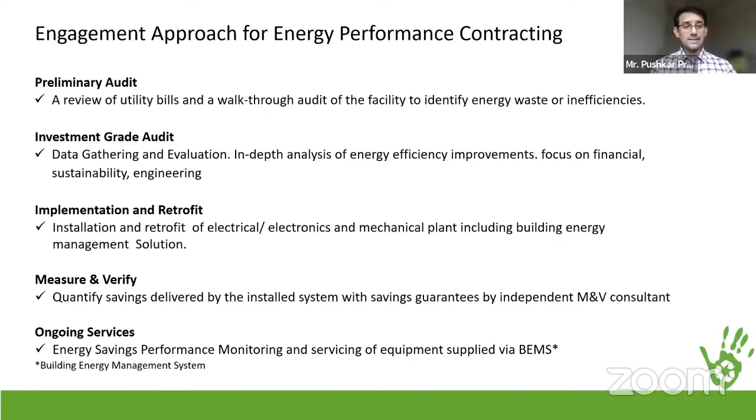Because these projects are typically long-term, the ROI comes between 2-3 years. It will also be an ongoing service in terms of monitoring the performance of the equipment and looking at how to optimize it, and that's where the building energy management system plays a big role. The good part of this model is that it has a positive impact on your EBITDA, and commercially, because there's a guarantee, the returns are very incremental. It's recession-proof—you see a reduction in utility bills and a reduction in carbon footprint, because energy constitutes a big chunk of our bills, specifically in the built environment or any facility management.

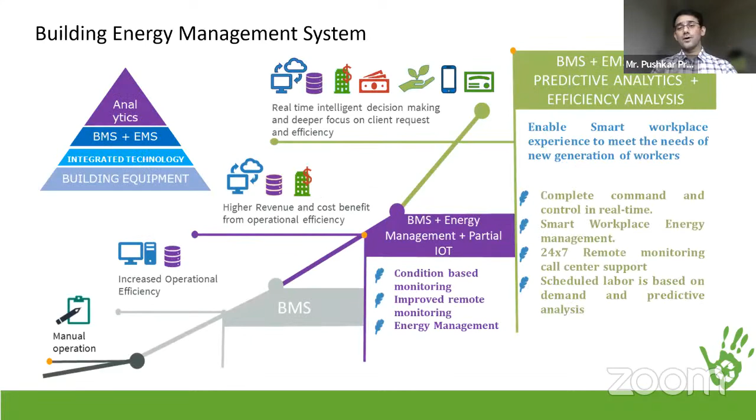Now, other thing that we also bring here is, while these are quite a lot of capex, and you have to plan out the project part of it, we know that aircon bills in typical every building constitute almost 52% of the total bills. And this is where we bring in a unique solution of the nets that we put in place. These nets are expected to get you almost 20-25% savings on the aircon bills. And this is very easy to install, does not need any sort of maintenance.

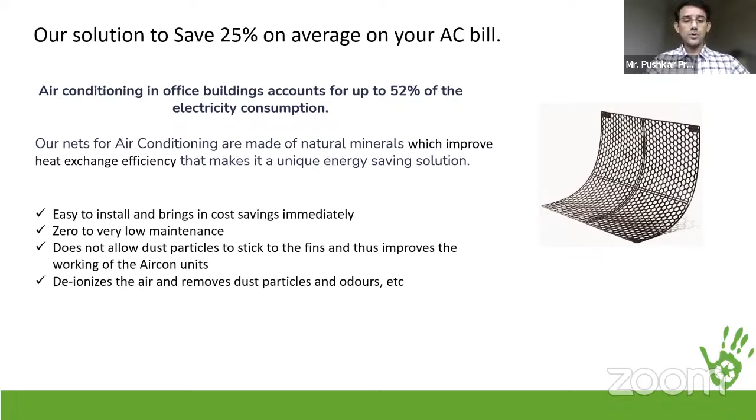And the way it works is that generally when you have aircon units, the air in that is all positively charged, while these nets are always negatively charged. So because of that, it offsets the static electricity that is there, and it brings in more heat exchange efficiency, and in that process also helps to reduce the aircon bills.

So with that, I will end my presentation here. I really hope that we are able to work together and get to a net zero and achieve the Prime Minister's vision, as said, for India as well as for Singapore. So thank you. I've left my contact details, and I look forward to hearing back from anyone who's interested. I'll take up the questions later, I believe.

Yeah, right. So thank you very much, Mr. Pushkar. What we like is the complete solution coming from your company, from your end, starting from feasibility to final implementation, and also the continuous monitoring that is so unique with regard to whatever services you may offer to some of the Indian corporates. So we'll come back with you, and we'll proceed further for the next presentation.

So now we have Dr. Shailesh Kharakwal. He is the Chief Executive Officer of H2O Mantra. Shailesh Kharakwal is a renowned expert in the areas of water treatment and water treatment for specialized quality or properties which can treat water of any kind, generated from whether an apparel factory or a commercial building or a factory or industry. So he has specialized solutions for every wastewater which is coming from different sources.

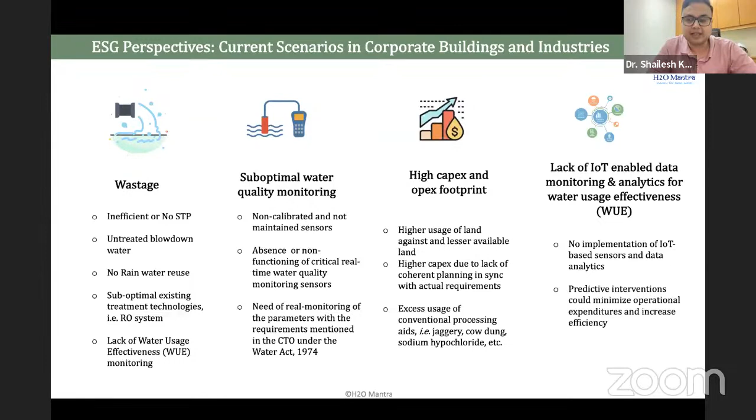Considering all these limitations, constraints, and requirements in today's scenario, we have developed EASE systems, which are basically environmentally accountable, sustainable, and energy efficient water solution systems.

They are environmentally accountable because we provide real-time sensing and automation. We extensively mitigate micropollutants and provide eco-friendly aids.

What we do is provide a low carbon footprint by minimizing the sewage treatment plant size or the water treatment plant size—I'll go into more detail in my next slide on how we do it. And we provide renewable energy integration; our plants can be run through the solar system. So our ambition is to provide a water neutral, or rather water positive, building, so that everything works in a sustainable way.

Whatever water is given to us by the municipal corporations, we recycle that whole water for our non-drinking purposes and also for drinking purposes. For this we have a mantra that we call RRR—not the RRR movie, but recycle, reuse, and reduce.

How we do this: recycling is through our IGBR technology, the state-of-the-art integrated growth bioreactor technology developed here at National University of Singapore. Reuse is provided through ZLD systems or rainwater harvesting systems. Reduce means reducing the footprints and the costs.

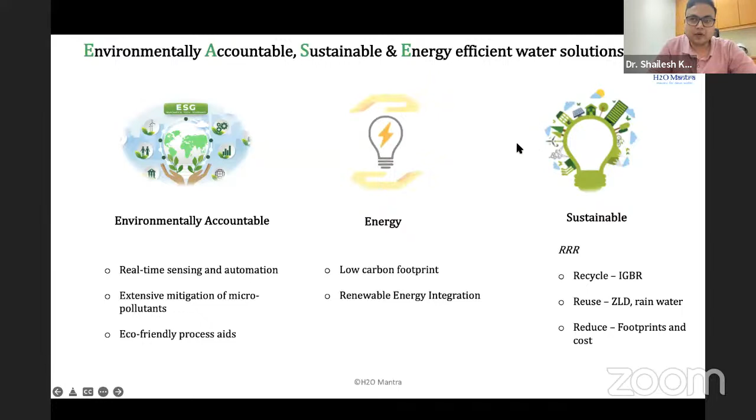Now I'm going to show you what a net zero building accounts to us, and how we can make a building water neutral or water positive. The alternative water use plus the water returned to the building, when divided by the total water use, should always give a value of one or more.

The alternative water use comes from rainwater or treated wastewater, whatever we are recycling. When we add them, the sum should always be higher than or equal to the sum of all fresh water use and all the alternative water use.

How we are going to do this, I would like to show you through a case study which we have successfully done for Nextra data centers at Pune. At the Nextra data center at Pune, there were 2 water sources.

Municipal water was coming—one water source from the municipality—and there was an alternative water source, the rainwater. So we made a rainwater harvesting tank there. We measured the flow of municipal water coming to the premise, and at the same time measured the rainwater flow, or the water depth in the rainwater harvesting tank.

We simultaneously did the treatment of the sewage water coming out from that premise and used that water for non-drinking purposes. At the same time, comparing the water coming into the sewage treatment plant versus water going out, we achieved 98% efficiency. This means only 2% of the water, made into sludge and later used for fertilizers, was wasted—98% of the water was used for non-drinking purposes.

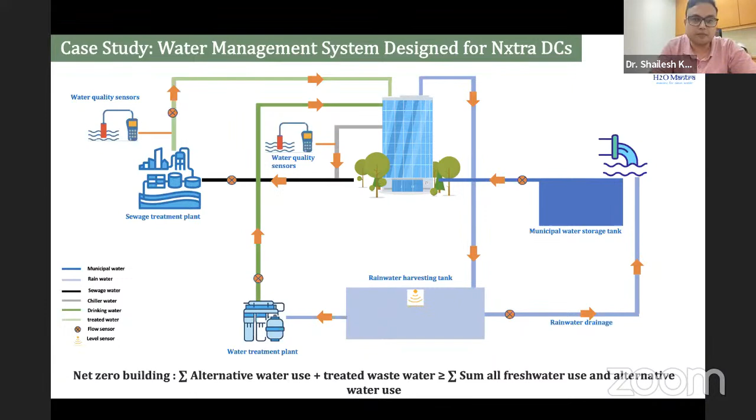I'm going to show all these things which we have proven, not just talking about them in terms of mandate or ideas, but already proven there. I'm going to show you a small clip of how we did it—it's a 5-minute clip. I would like to have your attention on that. Let me just show you.

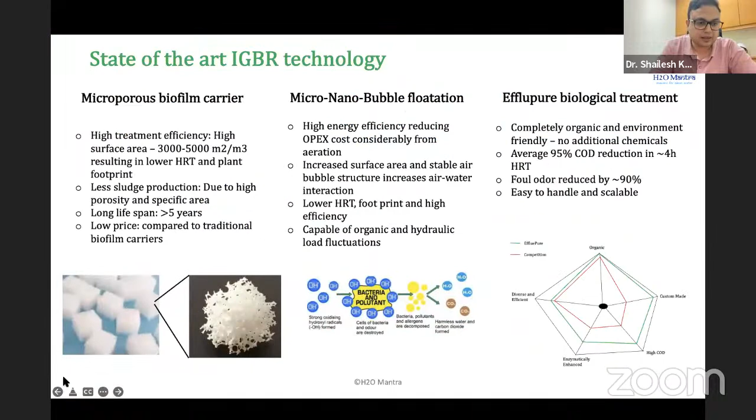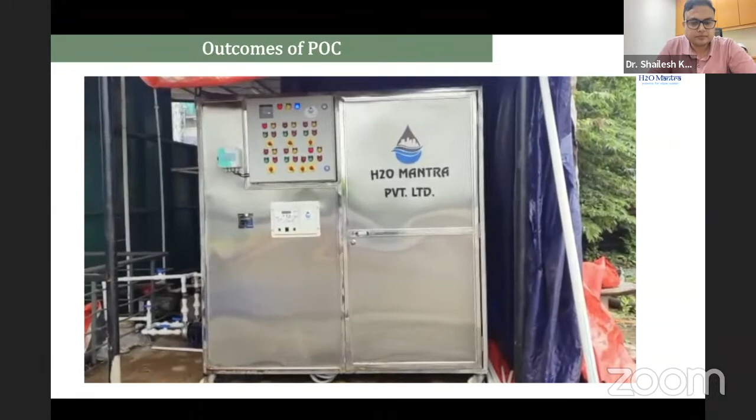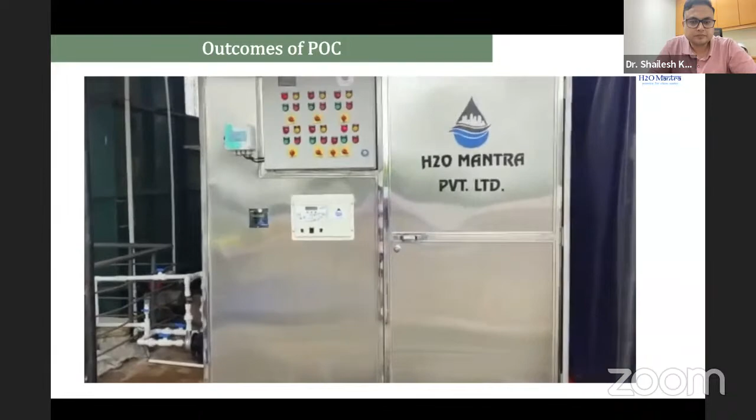This is a packaged sewage treatment plant from H2O Mantra, currently placed at Nxtra Hinjewadi, Pune location. It is based on state-of-the-art IGBR-based water treatment technology with all the unit operations encompassed into one compact unit. All the functionalities are also fully automated for its operation.

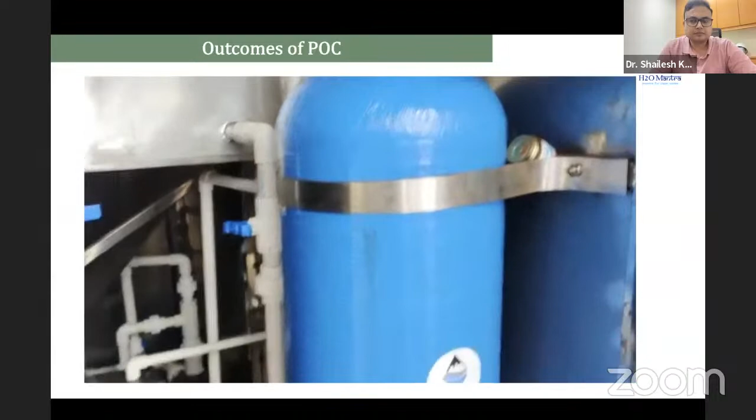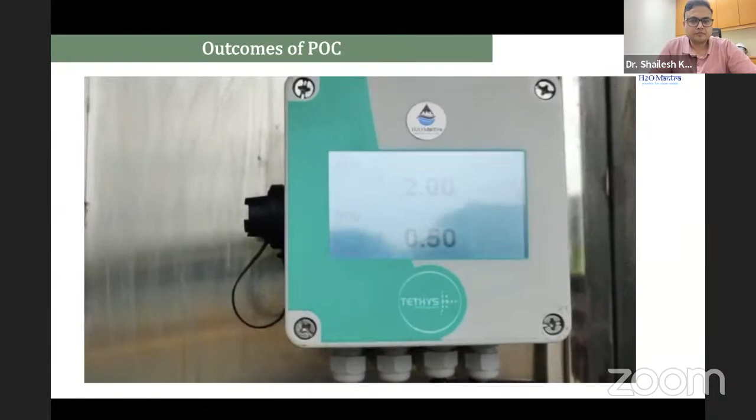This is a raw sewage water sample which will be fed into the STP system for treatment. If we zoom in, we can see different unit operations such as bioremedial treatment, oxo-nanoparticle-based filtration, and secondary treatment in the form of ultrafiltration. A real-time water quality monitoring solution displays 24/7 treated water quality. The treated water quality is significantly higher than the CPCB norms, making it possible to use the water for all non-potable applications.

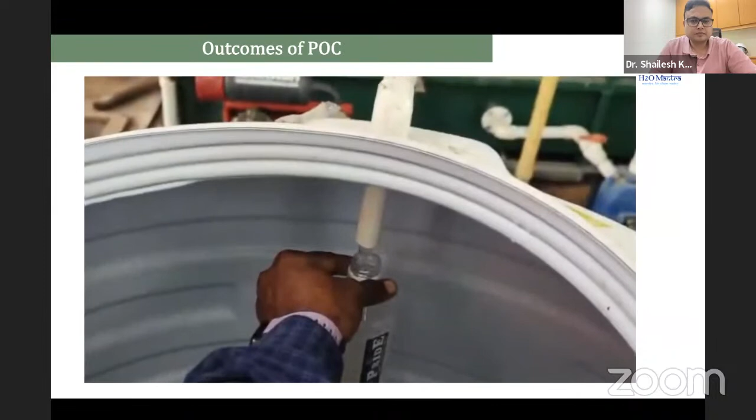This is also combined with a water usage efficiency monitoring system. With this high water quality of the treated water and more than 90% water usage efficiency, the sewage treatment plant is expected to create a positive ESG impact, moving towards making the entire facility a net zero water building. The treated water quality is very high and transparent compared to the untreated water.

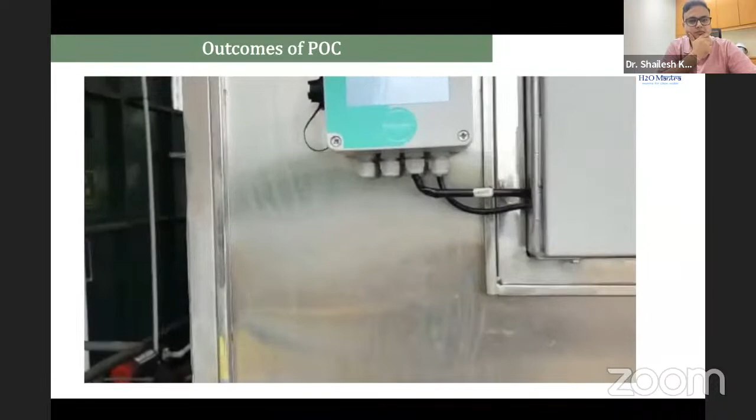The real-time water quality monitoring system and water usage efficiency sensors can be integrated onto the existing IoT platform for data visualization. This holistic exercise is aimed at higher ESG impact, paving the path towards a water neutral DC site.

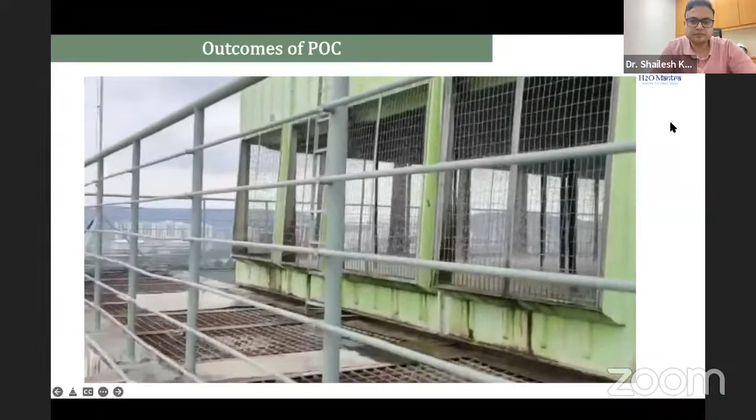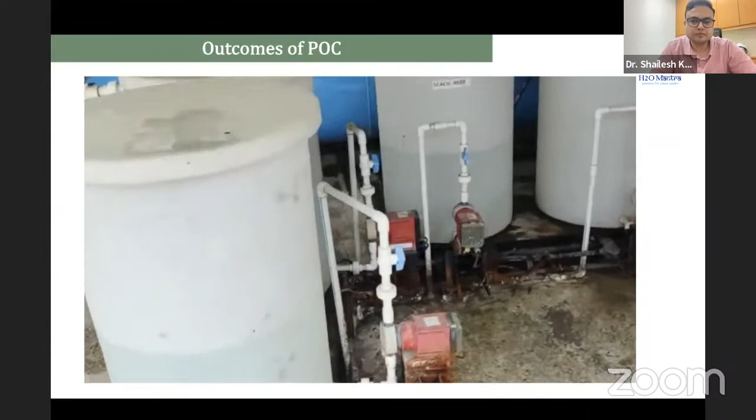Uncontrolled or suboptimal dosing of disinfectant for killing bacteria and antiscalant for removing hardness in data center chillers causes consumption of high amounts of chemicals and subsequently higher O&M cost. In the Pune data center, we observed chlorine and hardness monitoring have been done indirectly using some empirical methods.

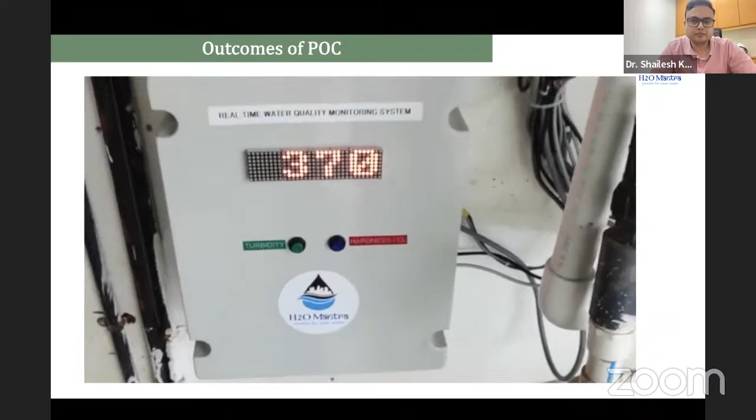Therefore, for providing exact free chlorine and calcium hardness concentrations in real time, we integrated our state-of-the-art free chlorine and hardness sensors. These sensors are integrated with the IoT dashboard and provide real-time values of the parameters. Using AI integration and trigger mechanisms in the IoT dashboard, we shall be able to control dosing of pumps for optimal use of chemicals and hence save on O&M.

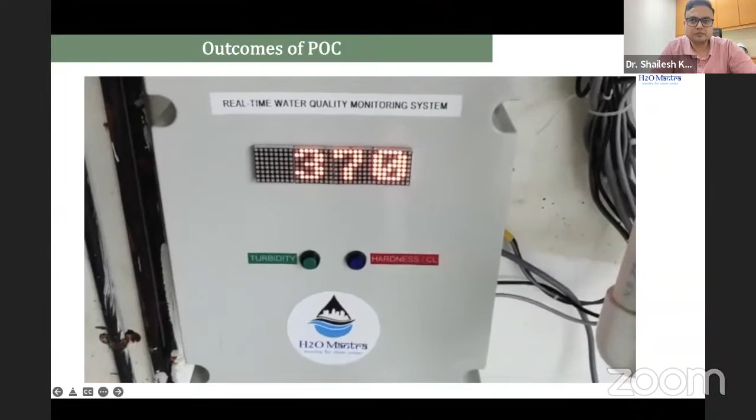We measured the water reuse efficiency there, and at the same time we minimize the footprint. The whole water treatment plant you have seen is the size of two car parking lots for two cars basically, and in that size we are able to treat around 50,000 liters of sewage water, changing it to ultra pure water which can be used for non-potable purposes.

We can use this for potable purposes also, which we have been doing here in Singapore, but for mindset reasons we kept it for non-potable purposes here. That is the IoT platform, and the rainwater harvesting system, how we are able to make potable water from the harvested rainwater.

So the technology behind this, when I talk about minimizing the footprint, minimizing energy usage, and increasing treatment efficiencies -- the technology is the microporous biofilm carrier, which provides high surface area and minimizes the hydraulic retention time. Micro nano bubble flotation provides higher retention time of bubbles inside the treatment tanks, hence decreasing energy use.

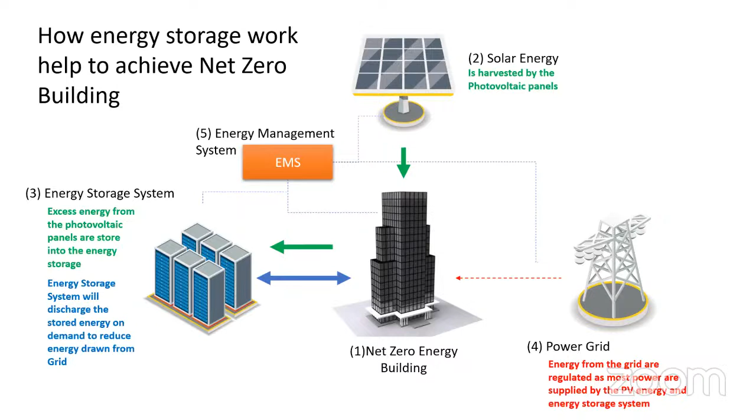Next, what are the factors we need to consider when looking into a net zero building? Firstly is the building consideration: load capacity, how much load the building requires, and whether there is sufficient land available for deployment of renewable energy assets to cover the load. Of course, one very important thing is the cost of the renewable energy assets, and this is one reason we need to assess whether solar, wind, or some other renewable energy generation source is most viable at the deployment location.

Next is the renewable energy sources itself. Correct sizing has to take into account the overall loads used by the building, whether the given land space is sufficient to build a renewable generation device big enough to support the whole load, and you have to take into consideration the energy generation fluctuations due to seasonal change of weather. In solar energy, certain months you have more solar energy, more exposure to the sun with less cloud coverage, and all this will change the amount of energy being generated per year.

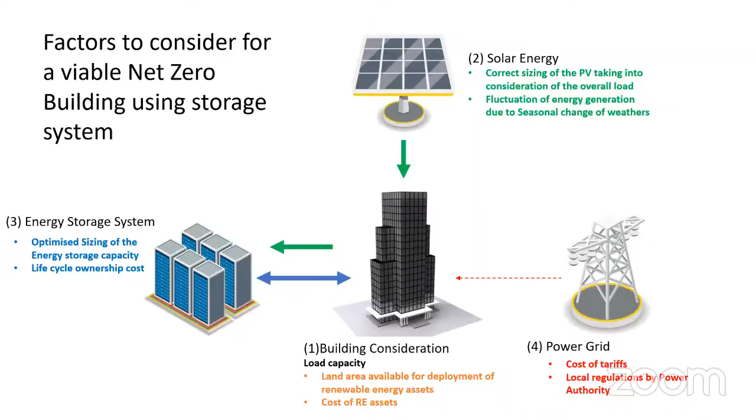And just to introduce GenPlus, we are founded in 2013. This year it's our 10 years. And for the past 10 years, we have been working in energy storage systems and renewable energy solutions. So we provide turnkey solutions for renewable energy to our partners and clients, particularly in the areas of energy storage deployment.

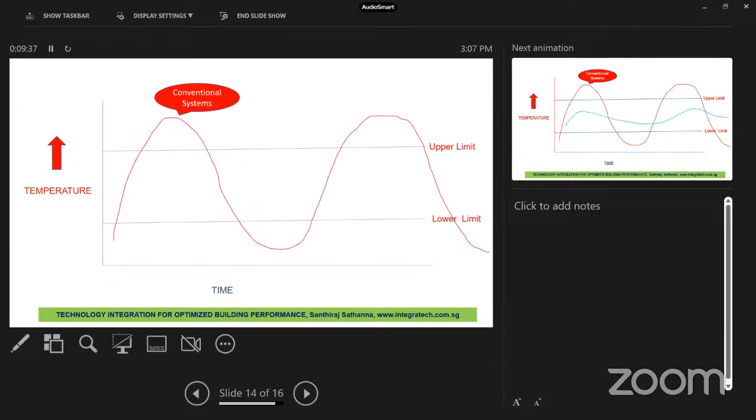For example, if you are having a conventional system, the parameter will travel or journey around the upper limit and the lower limit. If you use an AI and ML enabled system, it will stay well within the limits, and over time it will improve, and this variation will be limited.

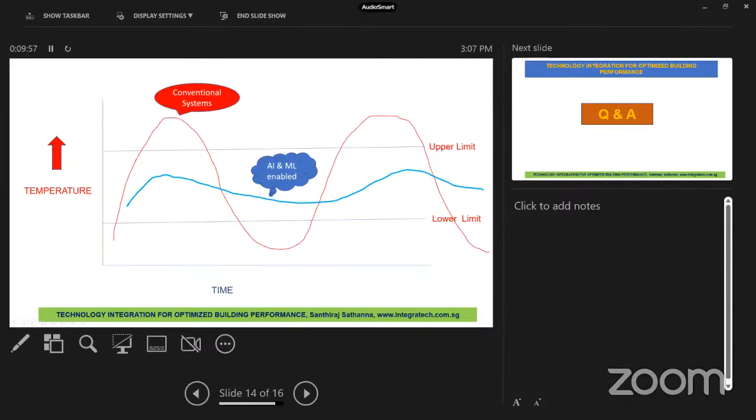I would like to invite first Pushkar. Pushkar, are you there? Yes. So one attendee has asked one question to you: what material have you used in the aircon filter which is there for energy efficiency? Please don't take much time because we are running late. Sure, yeah, it's some minerals that I used basically for deionizing as well as for creating a negative charge on that, but it's a patented product, so not much is disclosed at this point.

Okay, thank you. Then we have one question to Mr. Ming: what is the life of the battery which you are using in your energy storage solutions? Ming, are you there?

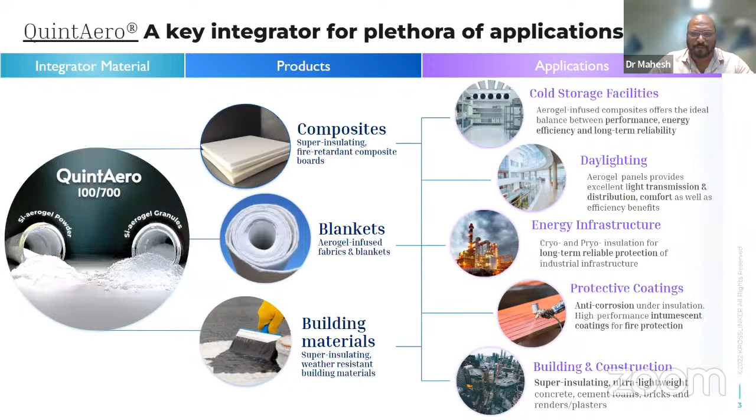These aerogel particles have very interesting properties in that they are able to diffuse light coming in from the sun outside. At the same time, they reduce the heat transmitted through the panel, and to a certain extent, the noise is also reduced. So there are several benefits you can see from just using aerogel particles.

In Singapore, green building initiatives are usually endorsed and regulated by BCA, the Building and Construction Authority. They have set a limit on the RETV values of buildings for residential, set at 25 watts per meter square. By using our aerogels in a whole plethora of building materials such as panels for daylighting, or even in a cement mixture, or as a plaster on a render system, we are able to reduce this by 2 watts per meter square.

What does this mean in terms of CO2 carbon emissions? It means a lot. Just by reducing 1 watt per meter square, we are targeting to reduce 1,900 tons of CO2 equivalent. This was studied in a feasibility study on a 6,000 meter square building.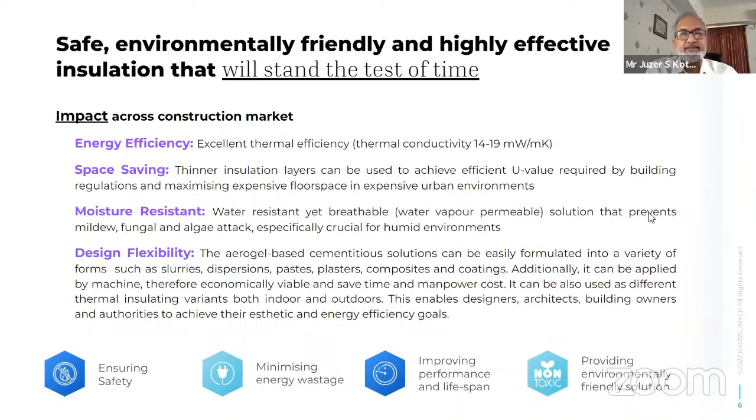How do you apply this? I mean, if it's between the two panes of glass, how do you apply the aerogel in between that? Do you have to go to the manufacturer to do that? How is it done?

We provide the design and the solution. So if it's between two double glass panels, we are able to fill it with the aerogel particles through a certain process, such as vacuuming or through a feeding stock. These are some of the solutions we provide for the manufacturers, so it will be very interesting for us to engage with several glass manufacturers who are able to use this as a use case in any of their building projects.

Which is why we recommend using it as part daylighting, part clear transparent. We can also try to improve the transparency of the panel. We have other means of increasing the transparency - for example, we can use a thinner lamination on the board, which will reduce the opacity of the panel.

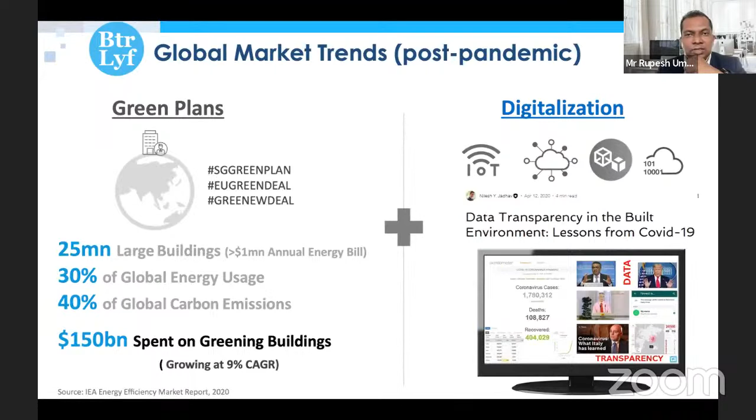So we all know the problem, right? How to have energy efficiency or how to make a building green. There's a lot of work been done on digitization, it's work in progress, and we are also working towards having a digital platform.

For buildings, most data are available with stakeholders like building owners, consultants, and ESCOs, with a few data sets available with product manufacturers. Green Finance is also looking for detailed, verified analysis for those buildings. So we have created a platform for all these stakeholders to put in the data available with them for any specific building and do the energy analysis. They get a base case scenario for that building and the best case scenario for energy enhancement.

So it's an AI-enabled digital platform. There's data input from various stakeholders, and the platform analyzes based on all the artificial intelligence and machine learning capabilities of the platform, and gives the result.

We are also working on a fully digital assessment for carbon analysis, as well as financial analysis due diligence. Chi Square is basically a spin-off from NTU Singapore, and we also have a good association with BCA.

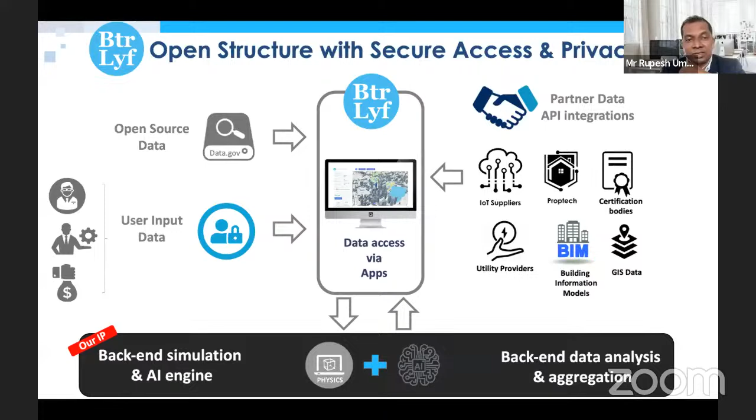That is it, thank you Mr. Rupesh. Very interesting — all of us are looking at something like a ChatGPT in our built environment business. I hope your tool comes true to that. It looks like it's going in that direction.

So before the audience asks a few questions, there is a lot of talk about digital twinning going on. Could you explain, because I think you are somewhere in that realm, what digital twinning is, and how would it help, and whether your platform would be in a position to do that?

Yes, so digital twin, as we know, there are two — one is static and one is dynamic, right? Static is utilized by construction companies, so static is basically a BIM model for that particular building, and dynamic is the one which we create on simulation software for energy analysis.

So the concept of the platform started from digital twin itself. For Singapore, what we have done is pilot projects on simulation software, that is the digital twin thing, and we cross-checked our platform's ability by putting in similar data sets without creating a model on the simulation platform. Obviously digital twinning is a time-consuming process and needs expertise with these softwares. But a platform like ours would be a simplified tool working on the digital twin concept for energy analysis.

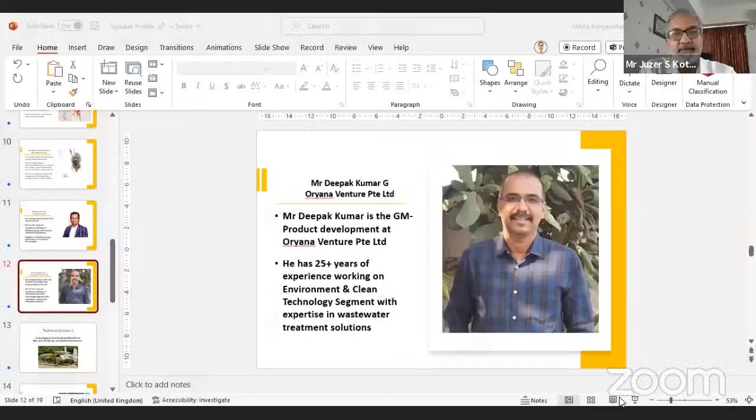Mr. Rupesh, question. Do we have time, or do we look back in the end? I think we are running short on time. I'm getting messages saying that we are really short, but I think this panel is too short to do justice to your topic. I think we need a much more detailed presentation. I myself am a very passionate simulator, and I can understand what you are talking about and the complexity of that. We would look forward to talking to you again. Thank you so much. You will have to excuse me because I have to do another presentation here on decarbonization, so I'll have to log off. Fine, okay, thank you very much.

So we have the last panelist, Mr. Deepak Kumar Ji. Deepak and I are colleagues earlier, so I know him well. Deepak is the General Manager Product Development at Oryana Venture Pte. Limited. He has 25 plus years of working experience in environment and clean technology with expertise in wastewater treatment solutions. So over to you, Deepak.

Thank you, sir. I'll try to put it in the next 3 minutes what best information can be shared with the audience. Oryana Ventures is a technology-based organization trying to develop relevant platforms to deliver advanced environment management products and solutions. We are 60% owned by Singapore families, that's how we got into this platform. Getting straight into the crux of the discussion, net zero water, because we are basically into water, STP, sewage treatment plants.

To set the context, the pain points of any builder can be listed like this: we need quality, we need to use cutting edge technology, and we also have to have good vendors on board. At the end of that, we should be operating it with ease and also maintaining it with ease, towards meeting the compliance of local norms and regulations. So on top of doing all these things, the builder also has pressure to meet net zero targets. It's not pressure though, as the context was set well earlier, that it's good to do a net zero building in this trend of climate change.

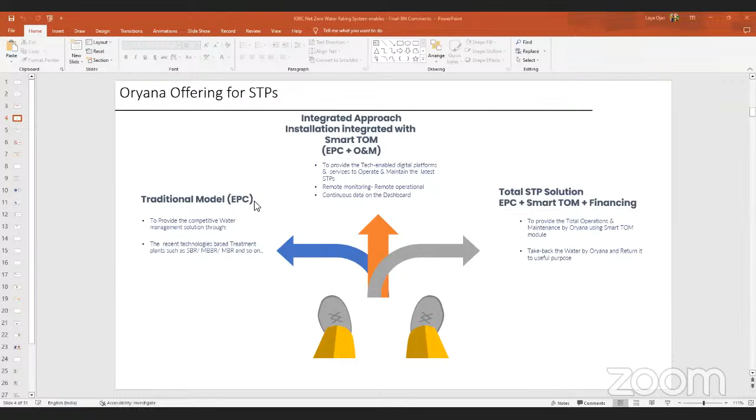So, Deepak, we are a bit short on time, so you can wrap up in 30 seconds. Sure. Looking at how we are trying to align with the IGBC perspective, it's again design from the design, construction, and operation stage.

We are looking at designing suitable sewage treatment plants and also harnessing the alternate water, connecting the alternate water with the right use, 100%. Maximum 40-50% within the campus, but the remaining 50% also, how do we connect it with the right purpose, is actually delivering the whole business model. And we have a few case studies.

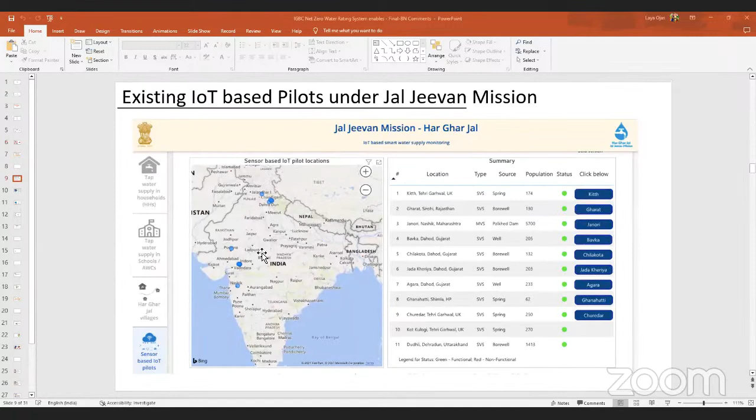Thanks, Deepak, I think you touched the core. There are STPs and STPs in India, but none of them run properly. So what technology or what do you do differently by which your STP will run better, or run without too much expert supervision?

Correct. So we are not developing an altogether new technology of STP in the market. There are technologies like SBR, MBBR, MBR. We are developing a module which takes care of remote monitoring, remote management of the plant, which needs less skilled manpower. Today, nobody is interested in investing in skilled manpower—that is a huge cost for running it.

And after spending that cost, there is no take for the treated water or whatever. So connecting that with deploying the smart module, improving the efficiency of operations, and also connecting the treated water with the right purpose, is the whole business model we are looking at.

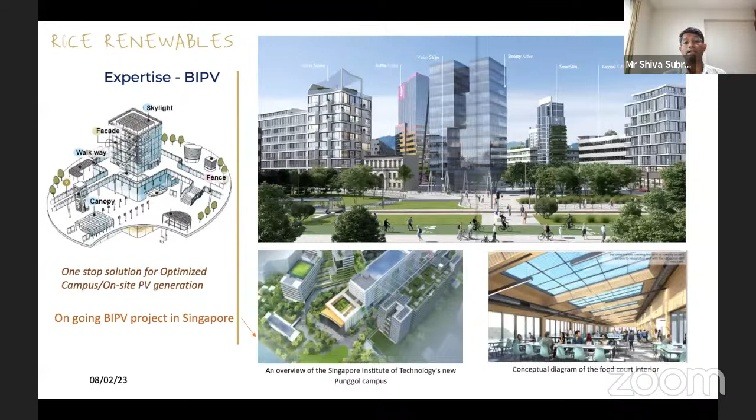So what differentiates us from other PV system integrators is this expertise. We have worked in almost all building related PV applications, be it walkway, facade, or skylight, we have experience. And together with my partner, which is a Japanese MNC, we have more than 200 project execution experience throughout the world.

Now, a bit more on the BIPV panels. Typically, this is a blown-up view of a typical PV panel. At the front there is glass, and at the back there is glass. The solution we bring to you is a glass-glass interface. In between, there are panels and cells sandwiched between protective layers. For a conventional panel, the portion you see here would be a backsheet, but for buildings, mostly it is a glass application. So all our solutions that we work on with stakeholders are glass solutions.

Now, the range of power output can be as low as 50 and go up to 160 watts per meter square. It really depends upon the application and requirements. In the subsequent slides, I'll explain why we have such a big range.

And it's customizable. When I say customizable, we do not have one standard size. Every project is unique, and every project we discuss with our architects has a different size, sometimes in odd shapes. So we can actually deliver these odd shaped sizes, and we work with the architects giving them inputs like what is the best efficiency, what is the best size for a given area, what is the best possible power output achievable, and how can we optimize this. These interactions go on for at least 1 or 2 years before we do the actual installations at site.

So a typical application is facade, like you see here, and balustrade areas, some kind of canopies that you can put on, and typical walkways. Interestingly, we have project references, which I'll show in subsequent slides.

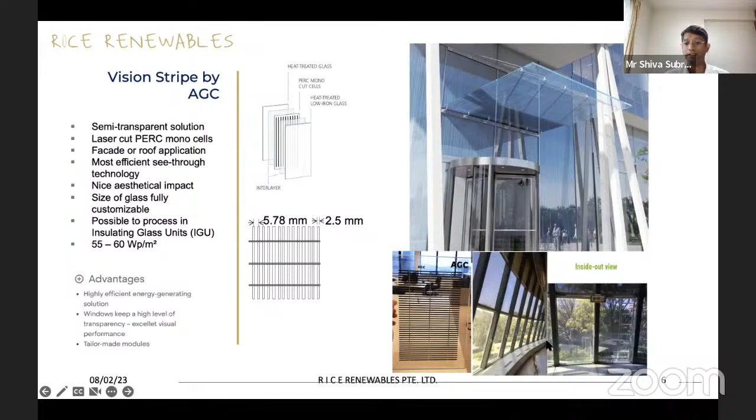So this picture is from the inside view. You still have a very clear picture on the outside. So this is one big advantage of the solution.

And this is another interesting application we call Artlite, from AGC Asahi Glass, Japan. The application is wall cladding, wherein you can actually get your logos active. This is for a real project application shell, and these logos are actually created by a patented rasterization method. Basically there's an integrated visual area sandwiched between the front glass and the black glass, and this gives you this customized picture-like effect. So it's really possible to print out your own designs, your logos, any images, even your own picture.

You can bring it to the computer and get this done. This ranges from 100 watt to 150 watt peak per meter square. Why? Because the pixels inside can be packed densely to give a better view, but this gives a compromise in the power output. So based on the visual distance of your application, we can guide you on the ideal density package.

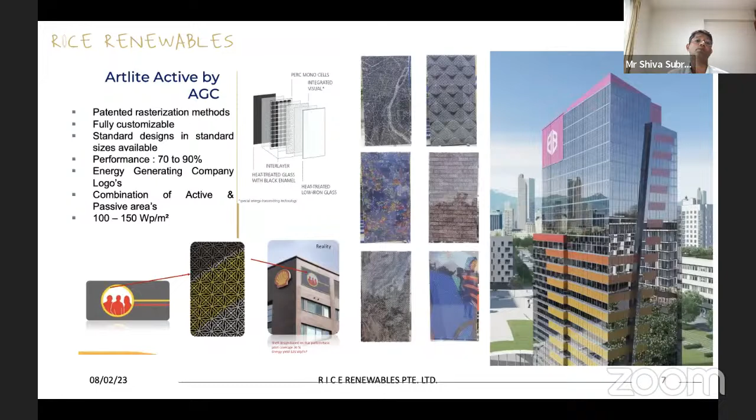This is one typical project from Chennai. The client is actually using this as a rooftop cafeteria. This is again with transparent backsheet, leak proof, a typical canopy application.

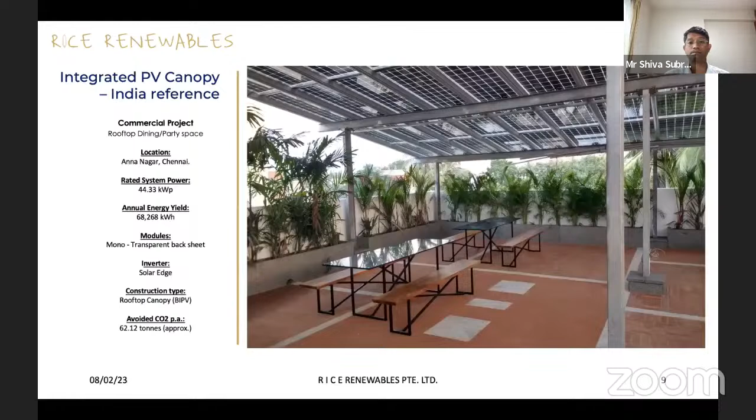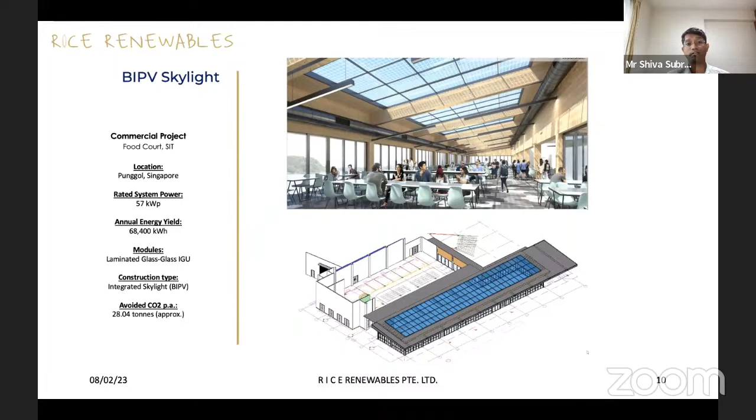This is an ongoing project in Singapore, the Singapore Institute of Technology. We are actually working on this project, and construction has already started. We hope to finish this project in June, so after June I can give you some nice actual pictures from the site.

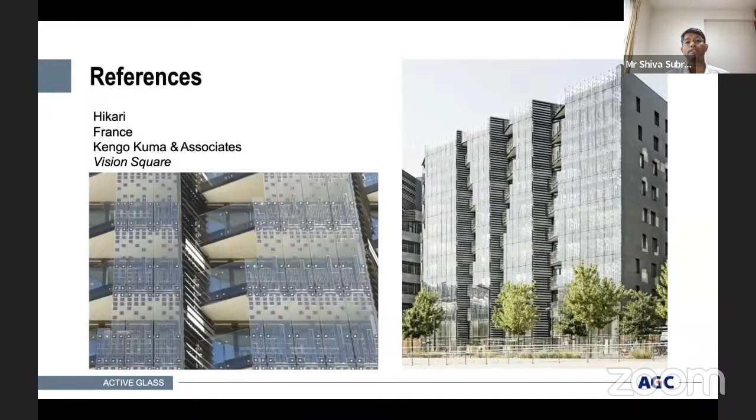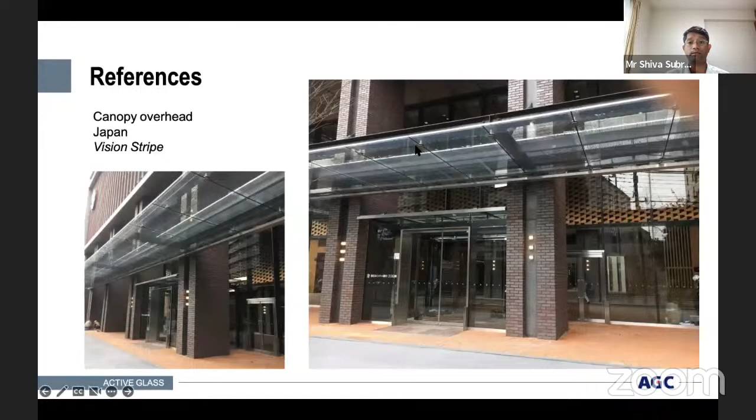So I guess that's all from my side today.

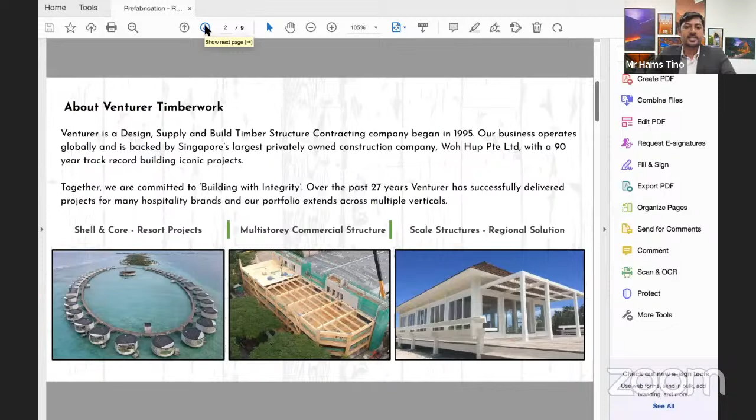This is Hams. We are from Venturer Timberwork, a Singapore headquartered business established in '95, and we execute projects globally. We do design, supply, and build, specializing in timber structures. Our business expands across different verticals, from high-end hospitality projects, especially resorts, into multi-story commercial structures using timber, and also identifying regional solutions from different places and coming up with large-scale projects in terms of villas and other categories. Together with our partners, Woh Hup, over the last 27 years, we have executed 100+ projects globally.

So the next step of our expansion, we have formulated a prefabrication facility in Chennai, India, where we cater to our global projects by doing prefabrication as well as sub-assembly of all the construction materials, like walls and roof panels, which get made into prefab cassettes that are then flat packed and delivered across the globe, especially to our projects.

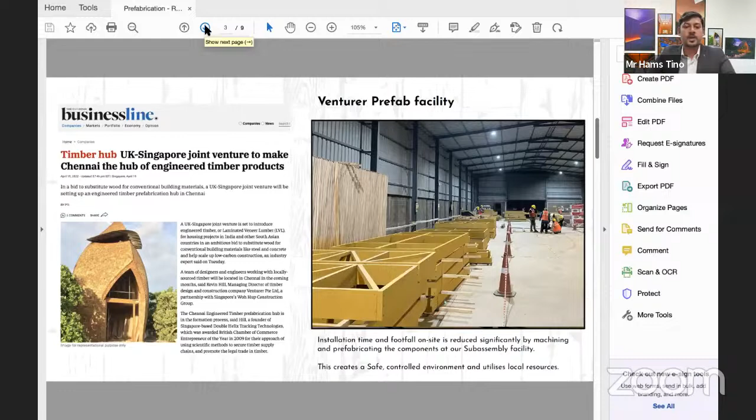So there is a question that always rises in people's minds: why consider prefabrication? This applies to all materials - it can be a steel structure, a concrete panel, and it can also apply to our timber structure. The obvious reasons, as we know, are higher speed and calculated productivity, and we can use advanced technology, and a definite quality assurance is made. This overall becomes a cost-efficient solution done in a controlled environment.

And then we can use the local resources in it, thereby reducing emissions and also efficiently managing the waste. So these are some of the advantages why we need to take into consideration a prefabrication technique.

Here is an interesting case study from our recent project. We have started delivering and rolling out cafeteria structures for Shell. This is a unit we did recently in Chennai, a 1,000+ square feet structure completed using regionally sourced timber materials. The prefabrication time in our factory was less than 14 days, and on-site it went up at super speed, less than 10 days. These are fully repeatable modules where we have the complete solution capable of delivering and installing in any remote location.

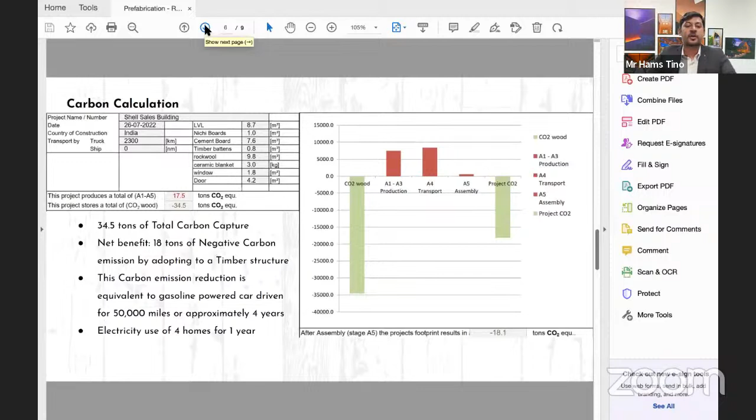This is a very high number, approximately equal to 50,000 miles driven by a passenger car over 4 years. It's also equivalent to powering 4 homes for a full year. These statistics come from the US government greenhouse gas emission calculator. So this carbon emission of 18 metric tons equals various parameters like powering 4 houses or driving a car 50,000 miles over 4 years.

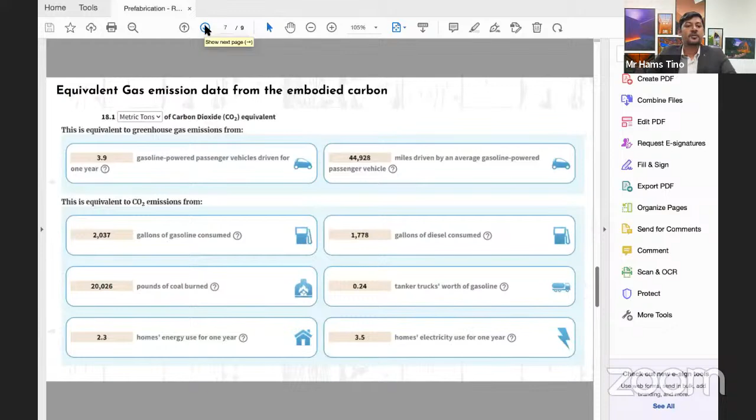So here is the future, why we need wood. At Venturer Timberwork we are focused on bringing technology into the picture so people can understand the benefits. If we go and talk to common people about switching to timber structures without compelling reasons, they won't be able to adapt. So we combine it with technology, putting together QR codes and barcode scanners so people scanning at the entry of our building can see where that particular timber was sourced from.

We are also expanding into technology where we put a barcode on each timber component, so people scanning it can see the exact amount of carbon stored within it, benefiting any end user accessing the structure. This can be a public building, like museums and artworks, where people coming in after hundreds of years can scan a timber structure's QR code and know exactly the total carbon stored within it. Only when users understand the benefit will they be able to switch to a better technology and choose a better component.

We have recently been working with agencies like the Aga Khan Agency for Habitat in terms of developing affordable solutions that can be rolled out to mass markets, adopting European techniques in design and engineering, and rolling out mass engineered timber options. For the Shell structures, we have been sourcing timber out of India and coming up with regional solutions, meaning much less logistics, cutting down the emissions associated with too much back and forth.

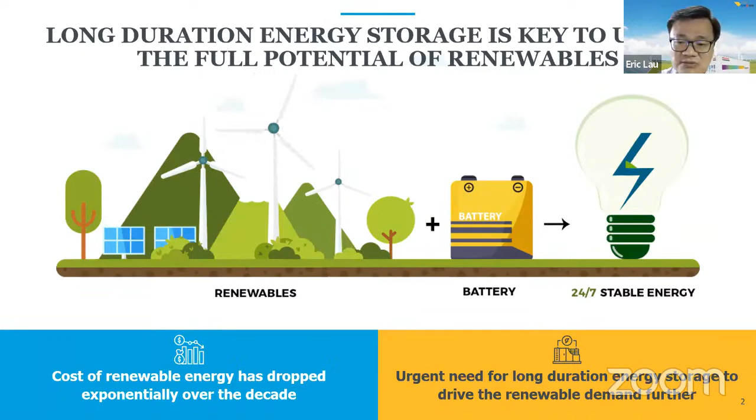So here, VFlow Tech gained through a lot of innovation prior to setting up about 10 years ago, whereby they innovated and researched extensively into the chemistry called the flow battery. It's a renewable kind of green technology, providing long duration energy storage to drive current demands of the renewable sector. So let's run through where the right applications are for us, especially in a building, a smart building.

So many such smart buildings are developing in such kind of scenario, a mix of renewable resources, a mix of green energy storage, to cater for the growth, not just the increasing building load and tenants load, but at the same time the coming EV adoption load as well.

So the beauty here is that we have a whole full turnkey solution, providing our energy storage based on flow battery chemistry, at the same time riding on our AI platform. This platform is energy management, which is able to curtail any peak load penalties or maximum demand penalties that would be incurred by any customer. For example, if suddenly the labs in this building turn on with heavy loads, this EMS will be able to turn on the supply from battery to the load to meet the excess load requirement without incurring any maximum demand penalty. The same platform can also be integrated to any energy management dashboard via common protocols, Modbus or CAN bus, so you could also integrate it as part of the distributed resources in grid scale.

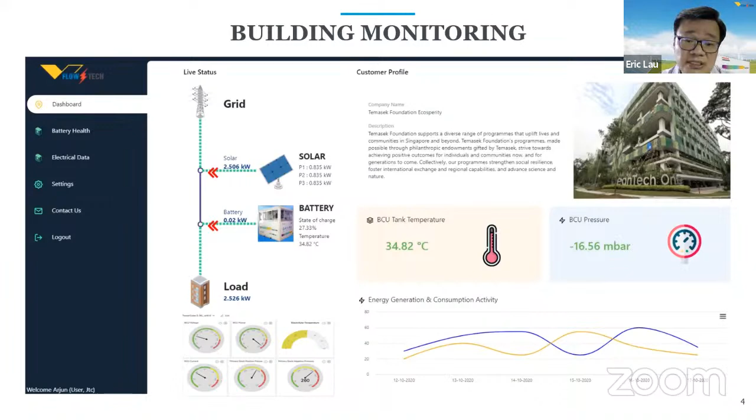So having said so, what's so good about this chemistry, the so-called flow battery? We focus on vanadium flow battery. Vanadium is the 15th most available element on Earth, and it has the best recyclable cycle time, meaning it can actually have more than 10,000 cycles over its whole lifespan, giving a duration of over 25 years. No other solid battery storage is actually able to cater for such a long duration.

So the chemistry is nothing much but the reduction and oxidation taking place over the power stack, with the vanadium electrolyte pumping to the power stack, whereby electrons are released as energy and stored as a backup. This repetitive discharging cycle can be done over 10,000 times.

It's a super safe kind of chemistry, which can gain approval for many fire safety requirements in terms of building deployment. All the parts in the flow battery are 100% recyclable, automatically contributing to ESG during the decommissioning time. And as mentioned, 25 years lifespan is one of the criteria.

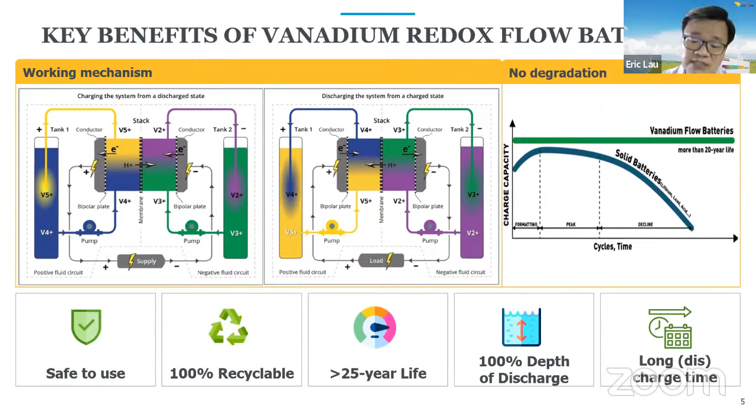What's special here is that we have built in tremendous effort in terms of research and design. We actually fabricate a power stack with our chemistry that can be used for fuel cell applications as well. It's about 25% higher density than any other competitor in terms of flow chemistry.

We also invented and patented organic IPs which allowed our flow batteries to operate in a very extensive wide operating temperature range, from -5 up to 50 degrees Celsius.

So our energy storage has been deployed in many geographies, including the Africa region, Western Australia, and even earthquake-prone Tokyo in Japan. Coupled with IoT enablement, our battery can be very intelligent, able to couple together with your building management system in terms of distributed energy resources or energy management.

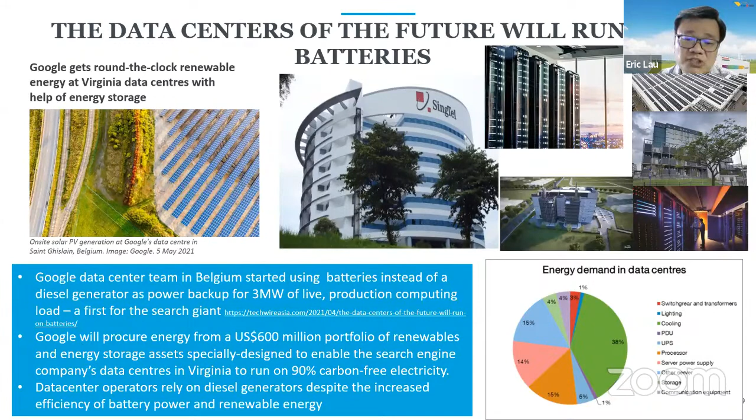Theoretically, we have many microgrids in islanded mode that would normally be powered by a diesel genset or other carbon-based generation. We are able to transform this into total green power coupled with renewable sources of generation, whether solar or wind, and provide autonomy of almost a day or two across islanded loads.

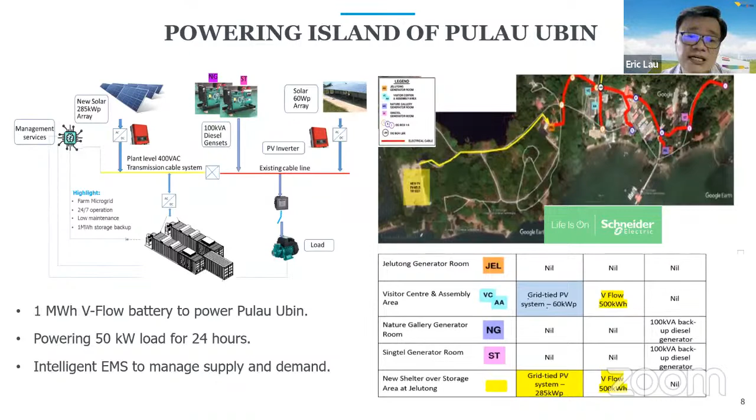Another use case is a big refinery, whereby we actually customize oil tanks into storage of electrolyte that can scale into megawatt hours or even gigawatt hours. We have successfully gained a presence in this type of gigawatt scale application projects.

The next thing is that we understand the next era will be EV adoption going exponential. The use case is very prominent. Today there are more EV adopters than ever in the last 5 years.

We see that there will be an immediate need for grid assets to actually improve to cater for this extra load for EV charging stations. So flow battery gives you very high availability as well as long duration to charge or transform a traditional gas station into an EV charging station together with our flow battery.

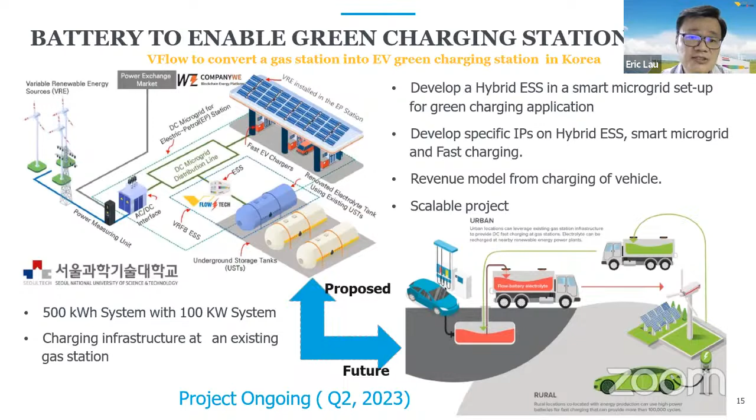Some of the market tractions beyond the project I mentioned at the fuel station - we have many use case deployments in smart buildings in Australia, Singapore, and many other regions. We also participate with green energy import, and for any green energy import, every last mile definitely requires multiples of gigawatt-size energy storage.

And with that, I'm happy to take any questions later in my session. Thank you very much.

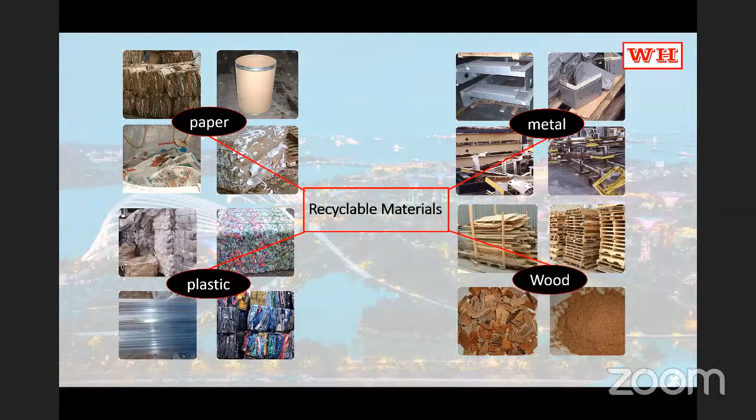Plastics with higher value, as everybody knows, and plastic recycling is also the hottest topic in the last one to two years, so everyone wants to recycle plastics. Plastic pelletizing, or mechanical recycling, is actually a very mature technology in Europe, in the US, and some developed countries. What we are doing is using our higher value plastics to make high value resins. These resins can again be made into new products or recycling products, or mixed with virgin materials to remake into PET bottles or plastic shopping bags.

So we provide technology, we provide know-how. If there's someone looking for solutions, like in Malaysia or in India, we can definitely reach out to them and teach them how to do so.

And those with lower value plastics, like more contaminated plastics, we are also working with partners. These plastics we will run into our pyrolysis system and make into oil. These oils have no pollution, and this entire system is a closed loop system, so dirty plastics, even without washing or shredding, can be fed into the equipment. The equipment has different sizes and capacity, varying from a few kg to even 10 tons or 20 tons a day. Through this system, all the plastic is converted into a very pure version of diesel, and this diesel can be used directly fed into your diesel trucks or forklifts. So this again will also close the plastic loop.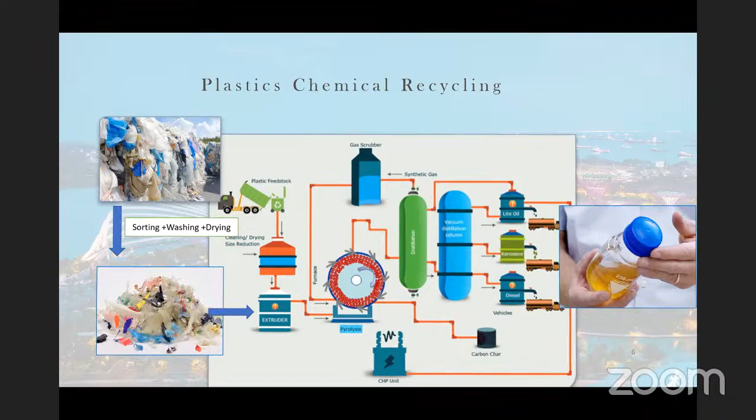And then those with too contaminated, or some biomass, papers, the remaining - those we will recycle whatever we can recycle, extract whatever we can extract - but those remaining, we have the technology to turn it into renewable energy.

So this waste to energy technology, we are working with our Chinese European partners. They have more than 200 plants worldwide - Europe, US, China, Southeast Asia, Vietnam.

So with this technology, whatever waste that we have, even household waste, we can just feed into the feeder. It's a grate system, using grate system through combustion. So we will generate - again, the technology will generate electricity.

Renewable energy will feed to our plant again, and the excess we can sell to the Singapore markets, or even if we replicate this model in Malaysia or in India, the town or small town or village people can use the electricity.

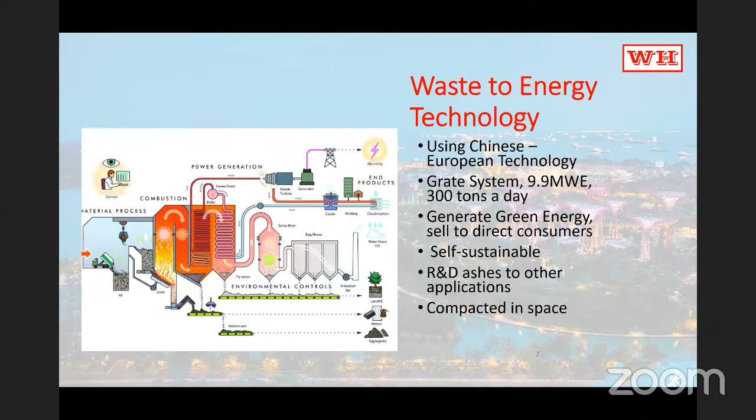So I think this model, our model, we will call it circular economy or zero waste facility.

So with this chain of technology, I think if there's a town looking for developers, or if there's an industry town looking for waste management companies to help them find a solution for how to manage their waste, I think our company can definitely go there as a consultant, or even become an investor to work with the governments or local partners.

So that's my presentation. If there's any questions regarding my presentation, drop me an email or text me after the presentation. Thank you.

Thank you, Roxy. I think it is really interesting, and there are many corporates that are going to adopt the net zero landfill concept. We are working with more than 20-25 projects, those have already enrolled for zero waste to landfill, and we would require your more and more support. What could be the business model for these corporates to go for zero waste to landfill?

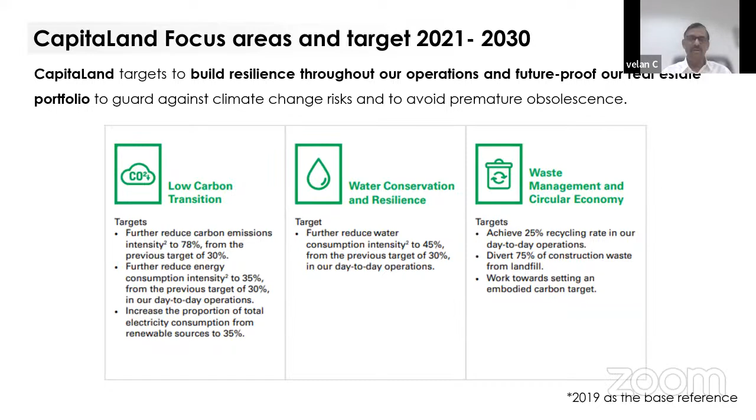Sustainability is attached to his KPI, so that means it is very serious and at the forefront of everything we do. We focus in this presentation on 3 areas: the sustainability targets for all our group companies across the globe. We focus on various ESG factors, but we'll talk about only 3 areas today: low carbon transition, water conservation, and waste management. We are committed at various levels in these three areas, which I am not going to detail now,

but you can understand from the website itself. We also conduct, year on year, a sustainability challenge kind of competition, wherein we used to select 30 companies, out of which 10 companies present to the leadership team. Those 30 projects are usually uploaded, and whichever country wants to use that kind of innovation project can implement those things across our projects. That is how we do it.

A few of the projects I'm going to share are of those kinds of things which we chose as innovative projects. We group this challenge into 4 components: low carbon transition, water conservation, waste, and health and safety. In these 4 categories, we conduct this year on year.

So leave that aside. We highlight 2 parts: one is existing buildings, how do we narrow down to net zero, and whatever new buildings we design and construct, how we will go for net zero. These are the 2 aspects I'm going to highlight.

In existing buildings also, we are trying to go for net zero by adopting all these initiatives. If you look here, all are energy saving measures. We go for district cooling systems, magnetic chillers, rooftop solutions, all being implemented to bring down energy consumption from today's level to approximately 10 to 15% on a year-on-year basis.

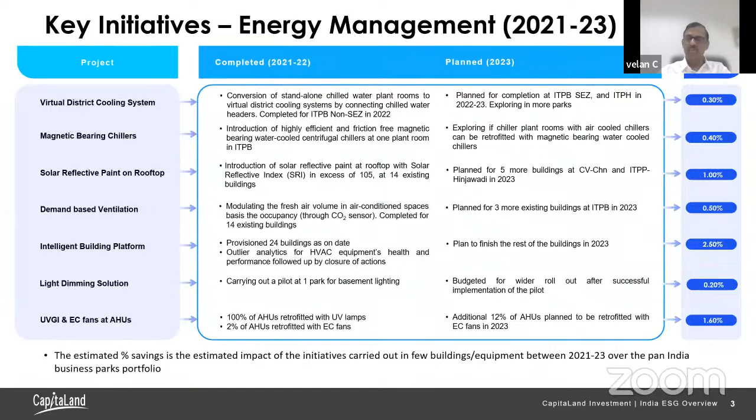Likewise for water, we also introduce smart water metering, smart irrigation systems, and water fixtures. All these measures also reduce water consumption.

Now I am going to go through the 2 projects which we chose in the competition, the sustainable challenge I was talking about. One is the vertical axis wind turbine.

This is the one we are right now implementing at our Pune project, where one of our innovation presenters brought in this product. We found it very interesting because it's 15 kilowatts, and we can use these turbines which will produce energy for the campus, and which is easily installable at the terrace level or wherever we want.

I just want to highlight this for many developers, if they are on the call. This is one interesting thing we can try anywhere. Generally wind turbines are considered to be 1 megawatt, 2 megawatt, 4 megawatt like that, whereas you can even go for 15 kilowatt, 30 kilowatt kind of vertical axis wind turbines, which is what we are implementing in our Pune project.

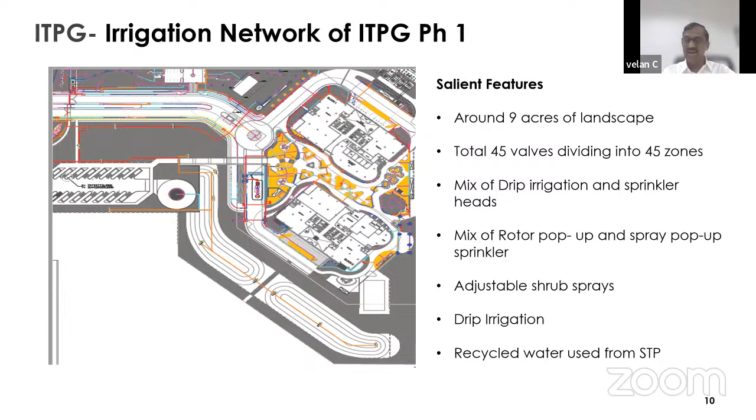The second one is a smart irrigation system which is IoT based, which some of the presenters also made representations on. This is also very interesting and very handy for implementing in our existing and new projects. The third one, a detailed one, is there as well.

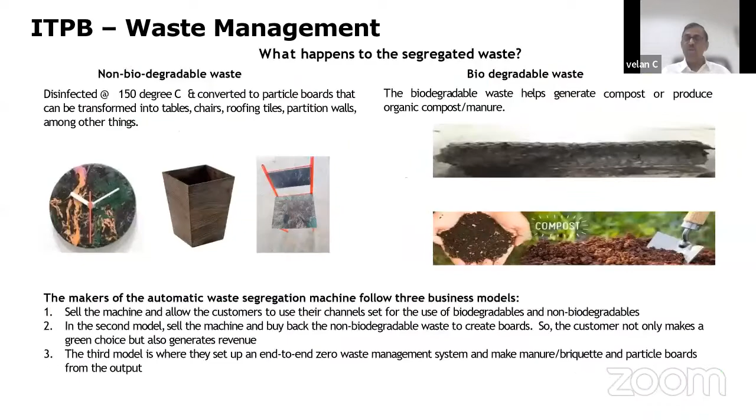Then waste: the circular economy is very, very interesting. Besides organic waste recycling, inorganic waste recycling is also done at the campus itself. This is what we have implemented in Bangalore, where we are recycling the entire inorganic waste into usable products like these bins and other things.

The next one, I'll leave it for a moment. I'll go quickly: in new projects, what we implement is that we went for all 3 categories of net zero. One of the interesting projects is in Chennai Radial Road - thanks to IGBC, they have given us enough learning - whereby this 2.6 million square feet of phase 1, phase 2 alone, site 1 on the left side, we have gone for net zero at the design intent level itself.

This is the first project for CapitaLand where we have gone for net zero for all 3 categories. How do you go towards net zero carbon in our company? I just want to highlight, the first step is to go for green certification at the platinum level. Step 1.

Step 2 is attempting net zero for all 3 categories. After that, focusing on embodied carbon, material use, and other matters, you target full net zero carbon. If you go straight for net zero carbon, many corporates may not be able to achieve that, so to motivate the system, we go step-by-step.

We have completed step 2, now targeting net zero carbon level. This is the pre-certification we've done for all 3 categories. How do we do that? We look at energy optimization measures, passive energy saving measures like building design and equipment choice, and besides that, we go for renewable power. All those things help us achieve net zero in all categories.

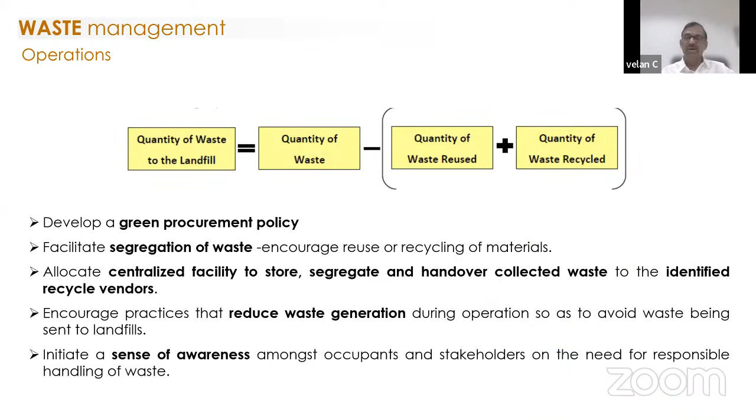I also want to mention that some speakers highlighted digital twin. It's very interesting to implement in these projects, not only for design efficiency and BIM modeling, but also for the operational twin, which helps with facility management. So for developers and technology providers, look at it. All developers in India are looking at technologies like what you have presented. Reach out to leading developers, including CapitaLand. We welcome you to support us and support the environment as a whole. Thank you very much, I'm open for questions later.

I'm sorry, I see you're coming into frame to close the conversation. Thank you very much, Shivaraj. All the very best to everybody.

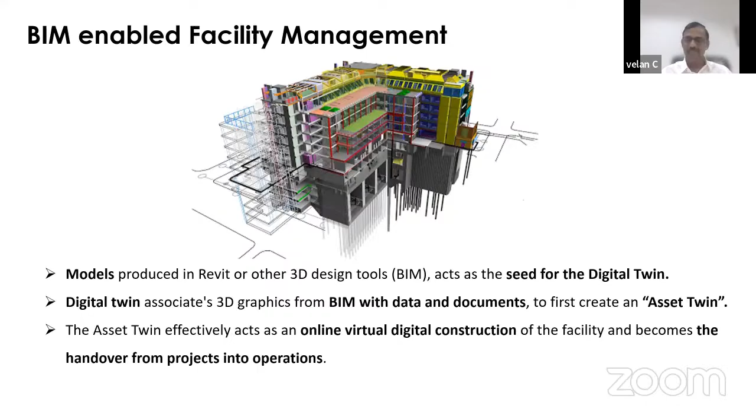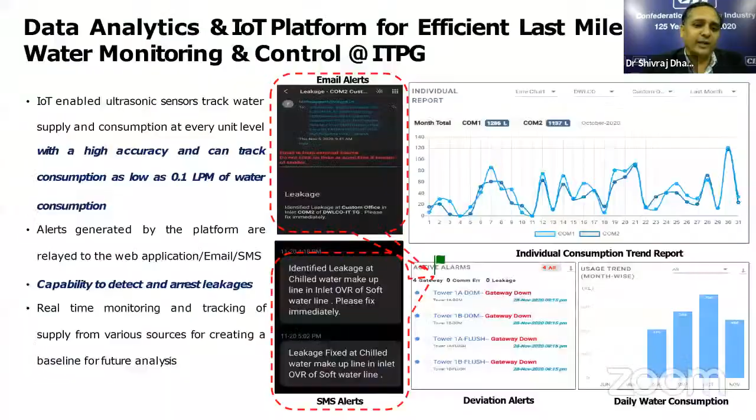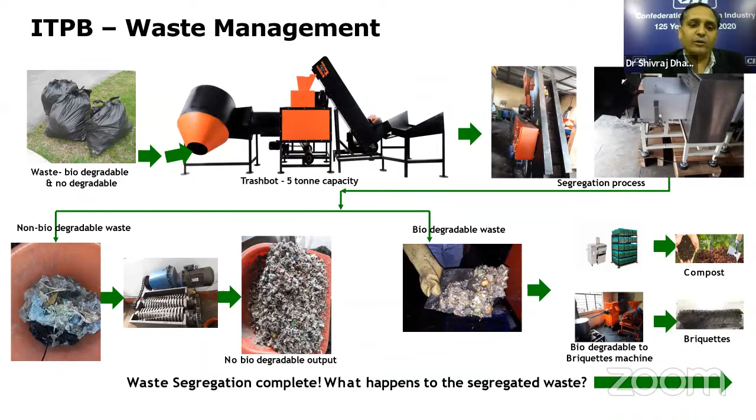Thank you very much sir, it was really wonderful to have you for this session, having CapitaLand, because by default you have implemented this concept for your assets, several projects in India including Bangalore and Chennai, for net zero energy, net zero water, and also going for zero waste to landfill, which is net zero waste. We really appreciate your effort, because you improved the performance of these buildings by adopting green principles, getting very close to zero, and having significant renewable portions for these projects. We are extremely happy to have you, and we need more pioneers like you to lead and transform the building sector and achieve net zero.